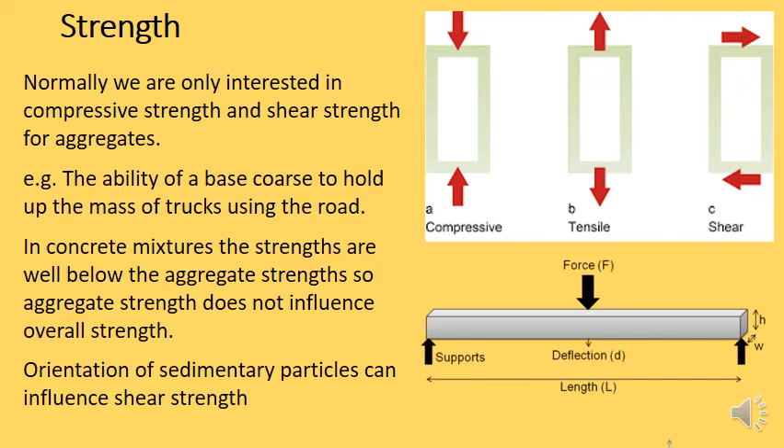Of course not. But the average diameter is basically, if we were going to take a cross section at various points and cut that particle in half, the average diameter or average cross section would be the average size of the aggregate.

So we've got different kinds of sizes, and these are very typical aggregate sizes: 5mm, 10mm, 20mm, 40mm, 80mm, and 120mm. I will also say that increasingly 25mm aggregate is becoming a very common size these days.

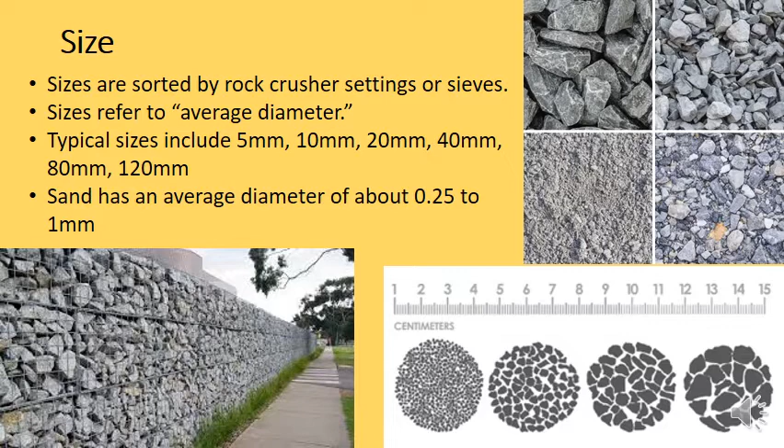Now, sand has an average diameter usually ranging between 1/4 to 1 millimeter. Normally the sand that we have here in Kurdistan is quite coarse. It's usually around 1 millimeter in average diameter. And silts and clays have a much smaller average diameter. They can be anywhere around 1 to 200 microns. So they're quite small. So that's about 0.001 millimeters. That's as small as clay would get.

Now, there's an issue with size that we need to take into account here. One thing I do need to say about size is that it can influence the strength of the aggregate. Remember, the aggregate will be stronger in compression and tensile and all directions, but compression really is what we're talking about here. The lower the void content is, the lower the void ratio. So obviously, if you have an aggregate where the particles are all the same size, the smaller the particle size, it will have less void content, and so generally it will be stronger.

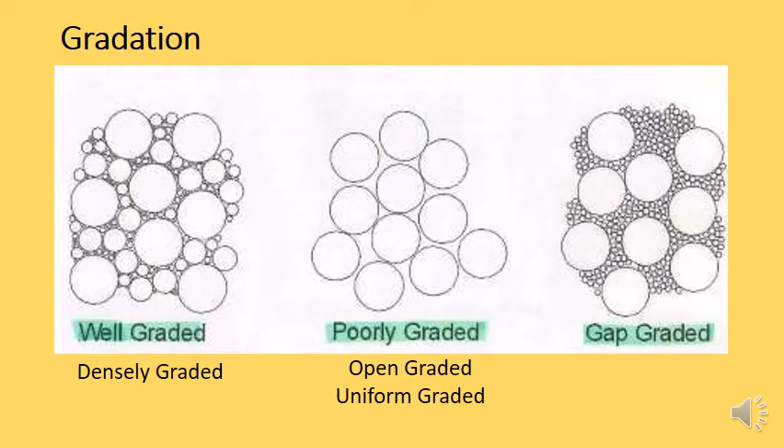So how do we test how well an aggregate is graded? Well, we do this using a sieve analysis. And I'm going to upload a video onto Moodle. There will be a YouTube link showing a sieve analysis happening in real time.

So if you have a particle of aggregate which is, let's say, 35 millimeters in diameter, it's going to fall through the 40 millimeter sieve, but it's going to be caught by the 25 millimeter sieve. It's going to sit in that sieve. And after that, we can tell if it's poorly graded or well graded or gap graded by taking basically the percentage of aggregate which is caught in each sieve.

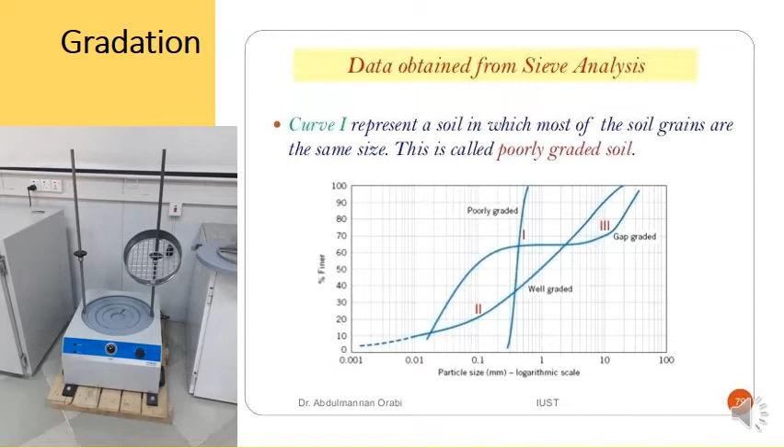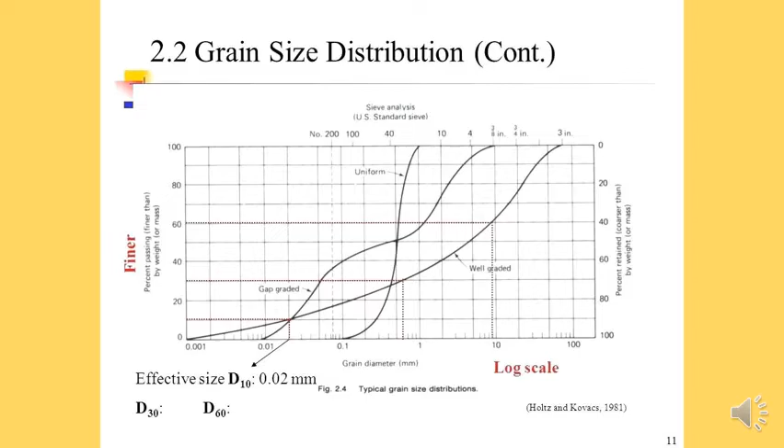So again, with a well-graded aggregate, you're going to have an equal mass of aggregate in each sieve, just about. A poorly graded aggregate, all of the aggregate is going to sit in one sieve or two sieves. Gap graded, it will be in two sieves that will be separate in size. And again, I've got a video of a sieve analysis loaded up on to the Moodle page. Please check that out. So here's an example of a sieve analysis.

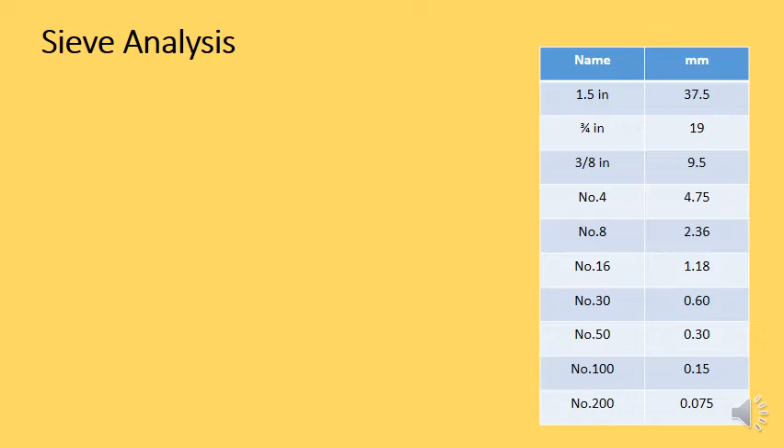Now one thing you need to know about a sieve analysis is that the sieves always come in standard sizes. And they're really confusing sizes. They are 37.5 millimeters, 19 millimeters, 9.5 millimeters. These are odd openings. Why aren't they 40 millimeters, 20 millimeters, 10 millimeters?

Well, the reason for this is that the science of a sieve analysis was developed in America. And in America, they still don't use metric units. They still use imperial units. And so they based their sieve openings off inches rather than millimeters. And so that's why we have very odd opening sizes. That's just something you need to be aware of.

Now, when you do the sieve analysis, you first take your sample and you weigh it. And then you place it in the sieves and you shake it, and then you weigh the amount in each sieve. Now that will be a percentage of the original weight. You take the total cumulative weight of particles passing through each sieve. So this is the entire weight of the aggregate that is smaller than that sieve, that fell through that sieve, and you divide it by the total mass, the original mass.

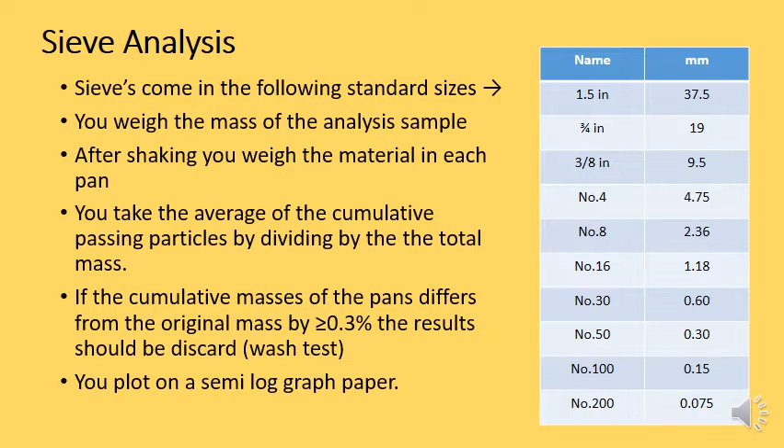Now, there's something called the D10. The D10 is basically the sieve opening, or the hypothetical sieve opening, where 10% of the particle mass will pass through. So any particle that falls below this 10%, it means it's the 10% of the total mass of the aggregate, which is smaller than the other 90% of the aggregate. That's what the D10 is.

It's the 10% diameter. You can also find the 50% diameter, where half of the aggregate is smaller than this diameter and half is bigger than this diameter. The D60, 60% of the aggregate is smaller than this diameter, 40% is greater. Now, the D95, or the 95 percentile diameter, is called the nominal maximum size. We can't go through the aggregate and look at every single particle and find what is the biggest size. So the D95 gives us an idea of the nominal maximum size from our sample.

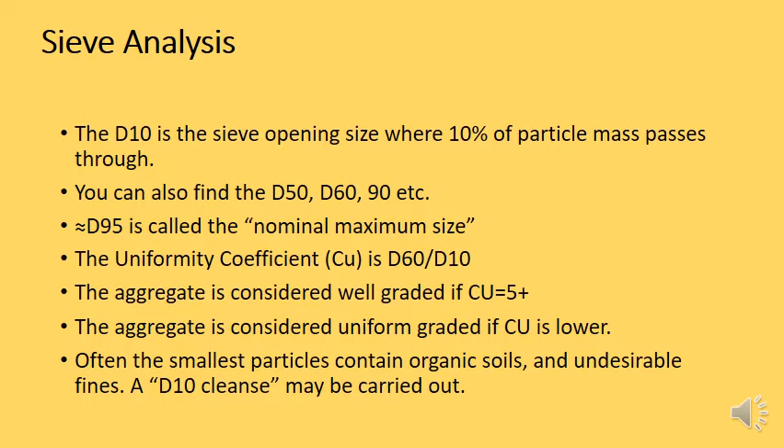You do away with it, and basically you're cleaning the aggregate of the organic soils and the clays and the silts and all of these really undesirable particles which have high porosity, and then you're just left with sand and crushed rock, which is much more stable and it has much less reactivity with water. That's called the D10 cleanse.

So this is an example of a sieve analysis. Now I'm going to click the animation here and show you the results. If you want to do this in your own time, then what I recommend you do is you just pause this video right now and you try and have a go yourself. But let's do the sieve analysis here. We can see on the left hand side column we've got all of the sieve openings.

So the biggest sieve opening in this experiment is 4.75 millimeters, and the smallest opening is 0.075 millimeters. And then there's also a pan, just a tray to catch anything smaller than that. Now we can see that after the shaking there's a mass of the sample caught in various sieves. So the 4.75 millimeter sieve, that left 9.76 grams of the aggregate in that sieve. Everything else was smaller and it fell through.

The 2.36 millimeter sieve, that held 59.63 grams of the aggregate and everything else fell through, and so on and so on. And the total mass of all of those sieves and the pan put together was 1,375 grams in total.

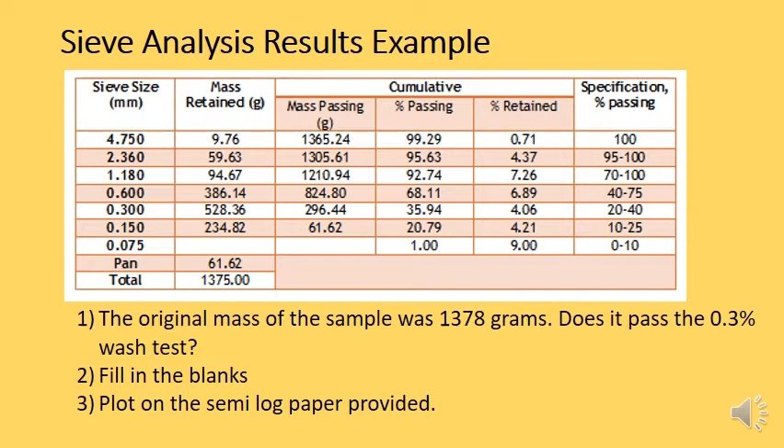And corresponding to that, we can do the percentage retained, which is basically 100 minus the percentage passing. So only 0.71% of the aggregate is larger than 4.75 millimeter diameter. So that's basically the sieve analysis. Following that, we can take that final column and plot it on the semi-log paper provided. Another question we need to ask ourselves after making that graph is, what is the nominal maximum size? What is the D95? Also, what is the coefficient of uniformity?

Well, first off, let's do question 4 here. The nominal maximum size is where 95% of the aggregate is smaller than this. Well, we can look at the percentage passing column and we can see that 95.63% of the aggregate is smaller than 2.36 millimeters. So the nominal maximum size will be about 2.3 millimeters roughly, or maybe 2 millimeters.

The coefficient of uniformity will be D60 over D10. The D60, well, you can see that when the sieve size is 0.6 millimeters, 68% is passing through, and about 36% is passing through at 0.3. So if we were going to plot this, we would probably find that the D60, where 60% passes through, the sieve opening is probably about 0.5 millimeters.

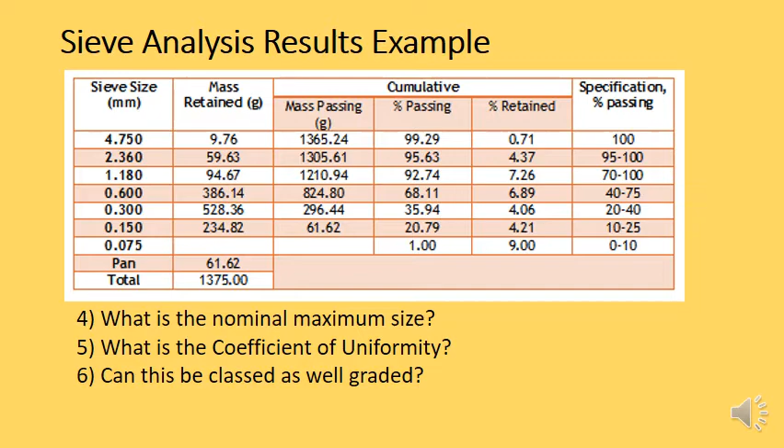Now, let's talk about well-graded and gap-graded aggregate. What would we use this for? Well, when it's well-graded or gap-graded, it has a very low void ratio. So that means it's got very high compressive strength, which means it's very good for road bases or building foundations. It's also very good for concrete.

Now the reason for this is that concrete is a mixture of cement and aggregate. Aggregate is the stronger part of concrete, cement is weaker, so obviously if a higher proportion of the concrete is aggregate, it's going to be stronger. Also, the cement, the binder, is very expensive. It costs a bit of money. And therefore, you want an aggregate that doesn't have big voids that need to be filled with cement, because it will be more expensive.

Now, one of the other things with well-graded and gap-graded aggregate is that it can actually bulk up. So you can have big voids inside. If you just pour it out onto the ground, you can then stand on it and press it down, because big voids may be inside that aggregate unless it's been compressed, meaning that you haven't pushed the smaller aggregate particles in between the larger aggregate particles.

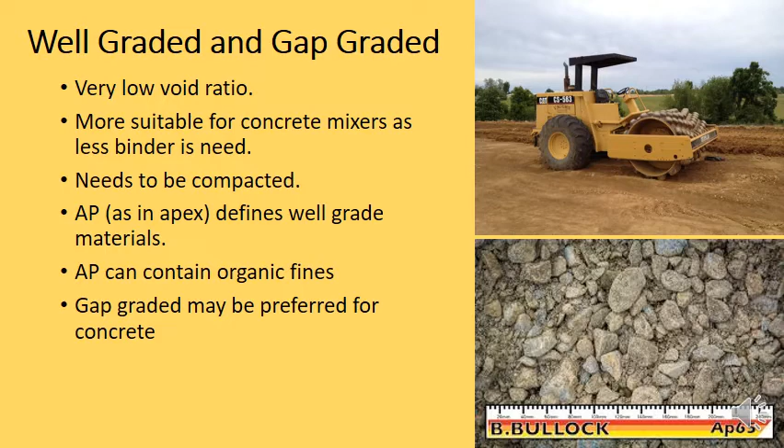So this is one of the things that they look for in soils for football fields. They will make sure the soil has a very high void ratio. One, because it helps the grass grow, but also because when it rains it doesn't form puddles on the surface. So they will use a soil where all the soil particles are roughly the same size.

The other great advantage of uniformly graded aggregate is that it's very self-compacting. This means that you do not need to press it with a compactor or a roller. When you pour it onto the ground, it automatically self-compacts. All of the rocks, which are the same size, will fall into a matrix like ball bearings, and they will minimize the void ratio.

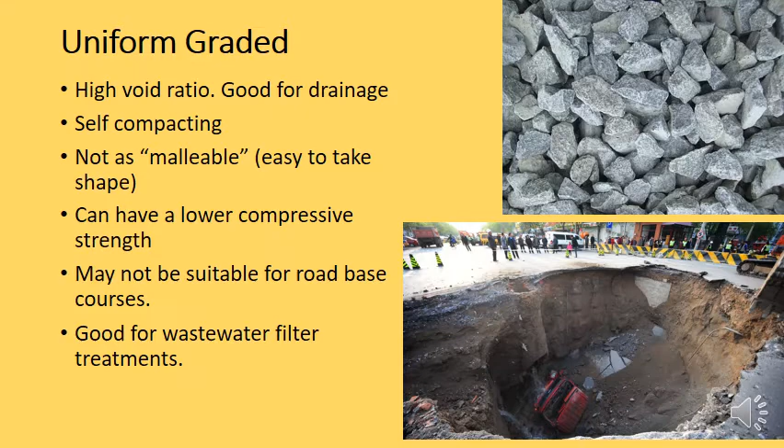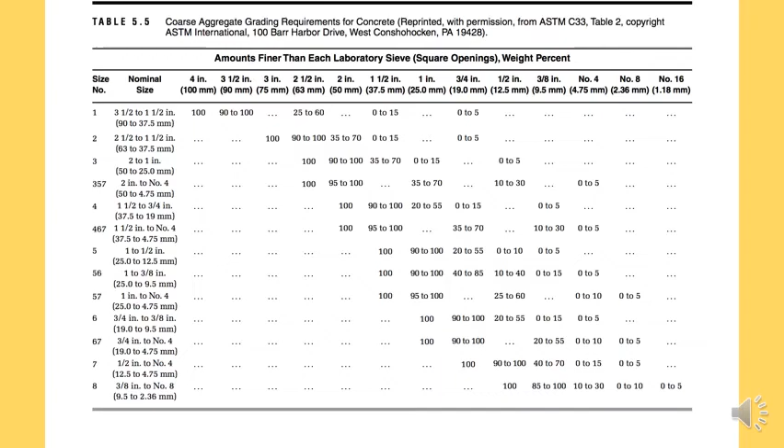In this video, we are going to take a look at the Los Angeles test, which is a measure of an aggregate's strength, or more precisely, its resistance to fragmentation.

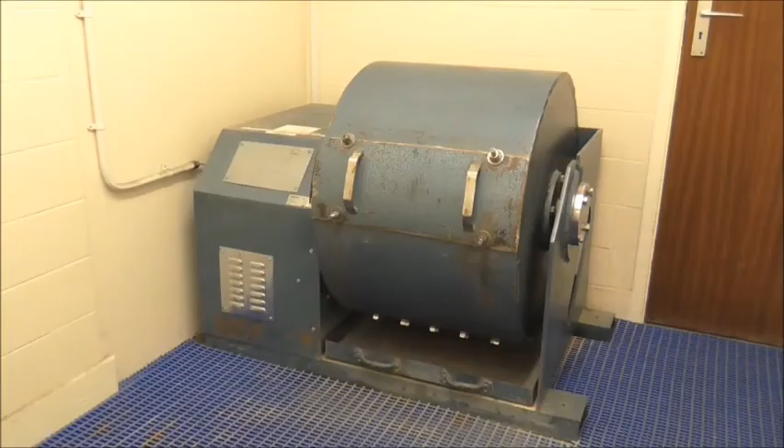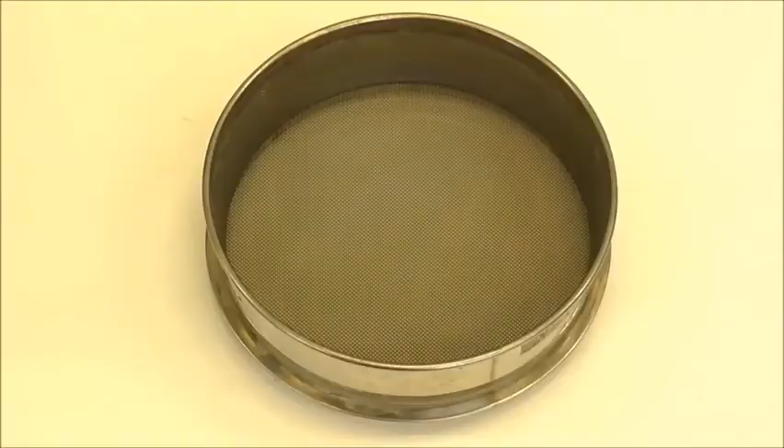The principle of the test is quite simple. A 5 kilogram sample of 10 to 14 millimeter sized aggregate is placed in a rotating drum along with 11 steel balls. The drum is then set to rotate for 500 revolutions, after which the degree of degradation is measured by using a 1.6 millimeter sieve. The more material that passes through the sieve, the less resistant the aggregate is to fragmentation. Now let's take a look at the test in more detail, starting with sample preparation.

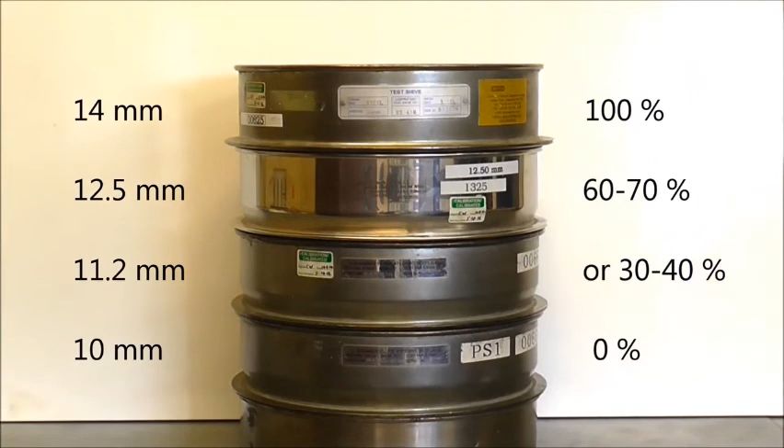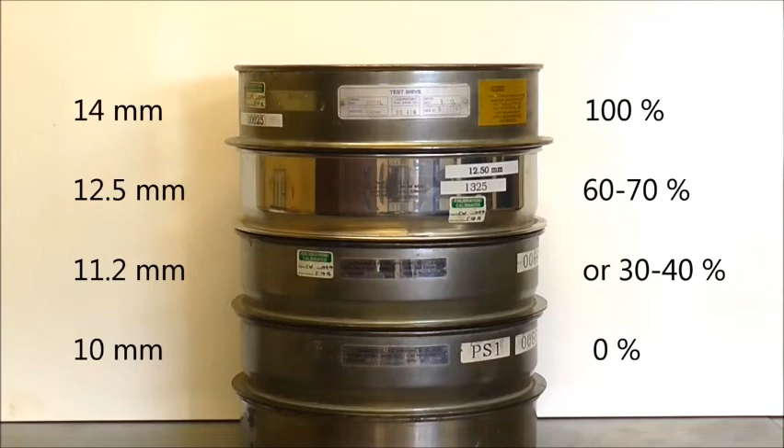The sample sent for testing must contain at least 15 kg in the 10 to 14 millimeter size range. Only material passing a 14 and retained on a 10 millimeter sieve is used. In addition to this, either 60 to 70% of this material must pass a 12.5 millimeter sieve, or 30 to 40% must pass an 11.2 millimeter sieve. The sample must be reduced to create two size fractions by using just one of the intermediate sieves.

The two size fractions are then washed thoroughly to remove dust, after which they are placed in an oven set to 110 degrees Celsius and dried to constant mass. When cool, the two fractions are mixed together and then riffled down to create a test sample with a mass of 5,000 plus or minus 5 grams.

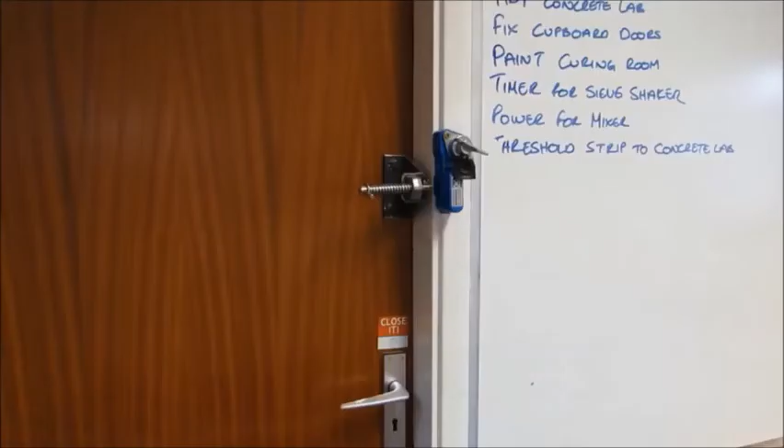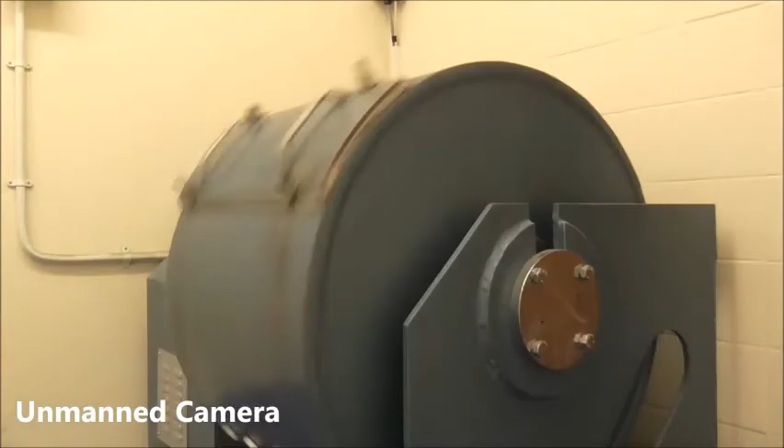After the balls and aggregate have been loaded into the drum, the front cover is replaced and secured. The power is turned on. The operative then leaves the room, making sure that nobody else is inside, locks the door, removes the interlocking key, places the key into the control box and starts the test. Nobody can now gain entry to the room without removing the key and unlocking the door. If the key is removed, the drum would stop.

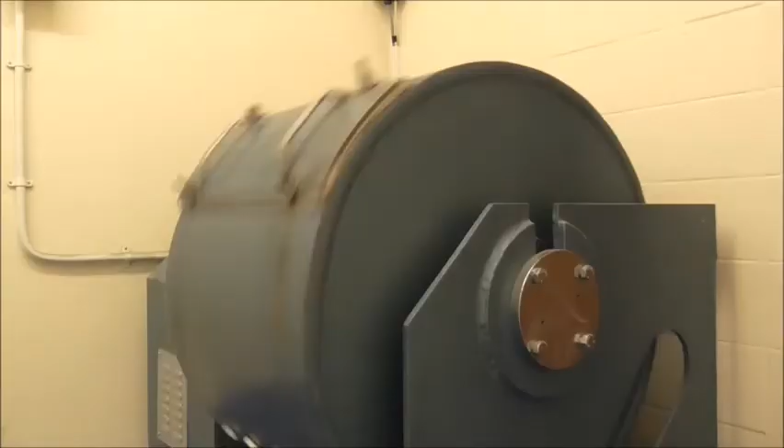Inside the drum is a metal shelf that lifts the aggregate and balls, which in turn causes the aggregate to become fragmented. Each ball must have a diameter of between 45 and 49 millimeters and a mass of between 400 and 445 grams. The test is noisy, therefore anyone directly outside of the room must wear ear protection. The test requires the drum to rotate at a speed of between 31 and 33 revolutions per minute. Therefore, it takes about 15 minutes for the drum to complete the 500 revolutions.

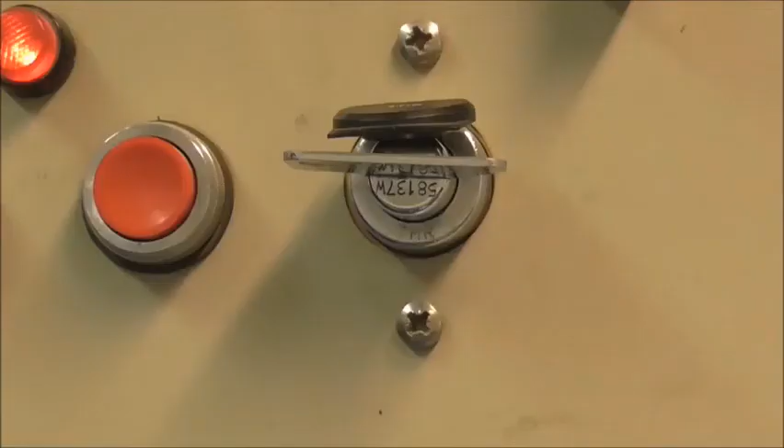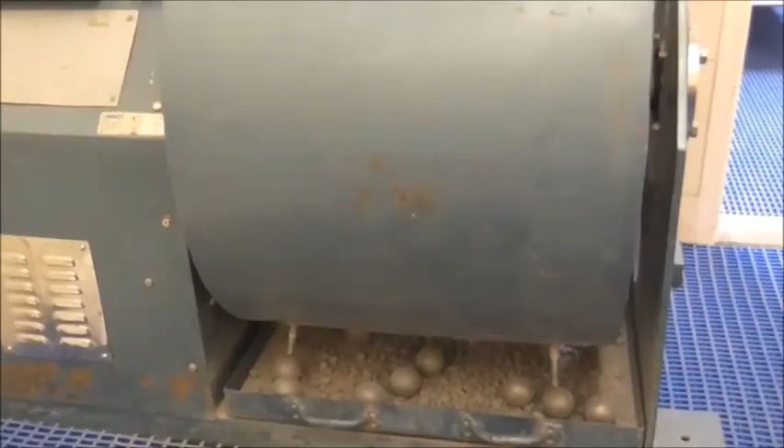On completion, the key is removed from the control box. The door is unlocked, and the operative re-enters the room. The power is turned off. The front cover of the drum is then unbolted and removed. The contents of the drum is then carefully discharged into the tray beneath. All aggregate from inside the drum must be removed.

The fragmented material is then taken from the tray and washed over a 1.6 mm sieve. It's a good idea to protect the 1.6 by using a coarser guard sieve. This sieving operation is done in several stages to avoid overloading. The retained aggregate is then dried to constant mass, allowed to cool, then weighed.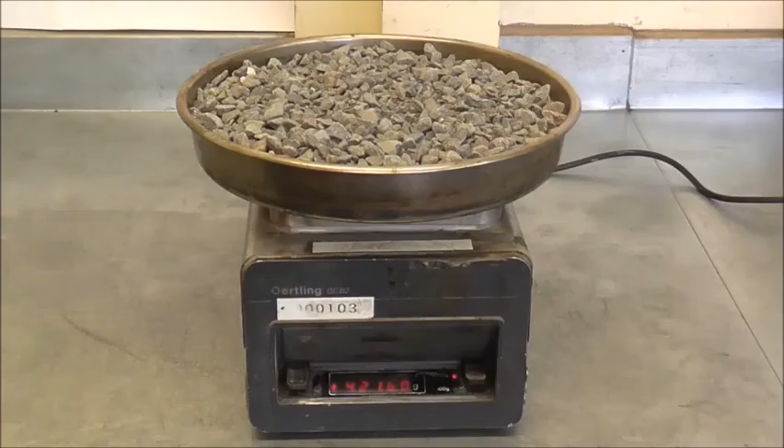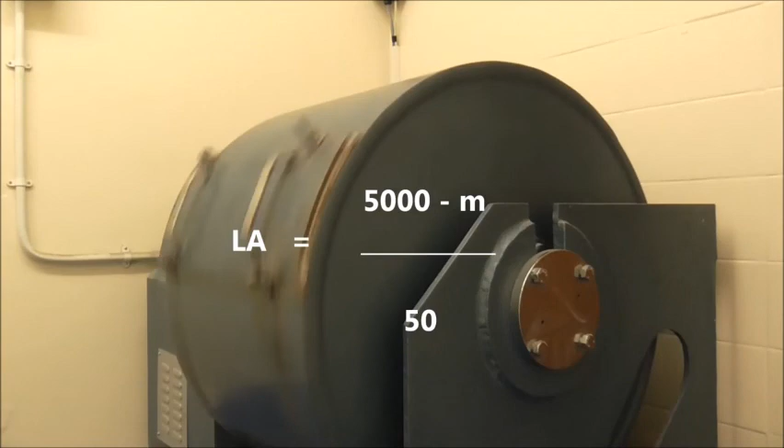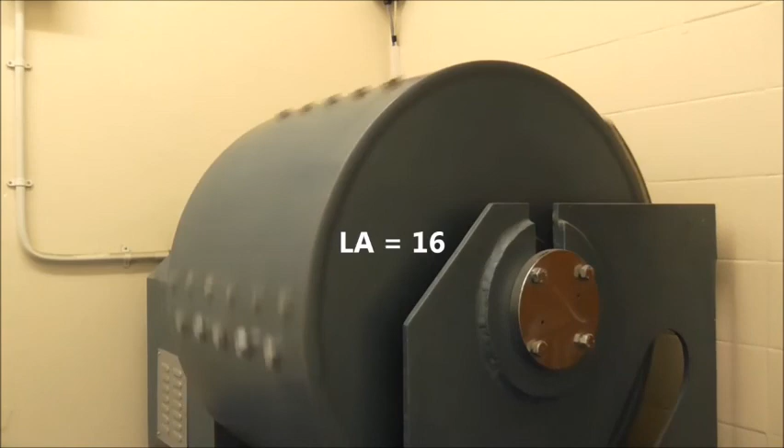Using this equation, we can work out the Los Angeles coefficient, where m is the mass of the material retained on the 1.6. So in our case, the equation becomes 5,000 minus 4216 divided by 50, which gives a value of 16, as we round to the nearest whole number. The lower the number, the more resistant the aggregate is to fragmentation. For more information on this test, please refer to the standard BS EN 1097 Part 2.